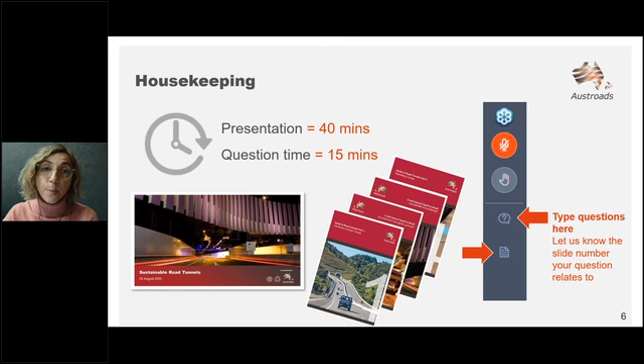So our presenters today: Georgia O'Connor, a senior professional leader in the environmental management portfolio of ARRB's Sustainability and Material Performance team. Tony Peglas, a technical director at Aurecon with experience in the planning, design, contract documentation and construction supervision of tunnels, civil structures and major infrastructure transport projects. And Les Lewis, an independent consultant with over 50 years experience in road engineering and management.

We will first hear from Georgia, who will introduce the team and provide an overview of the project. Then Tony and Les will talk about sustainability in road tunnels, covering some specific areas of sustainability practice. Georgia will conclude the presentation with the summary of key points, and then we will move to your questions.

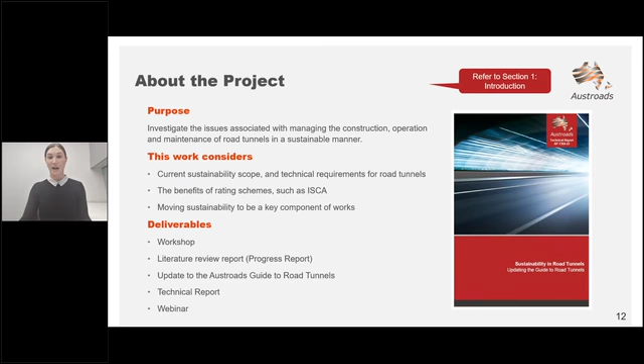So the 5 key deliverables of this project were a stakeholder workshop, a literature review report, a technical report summarising the research, updates to all 4 parts of the Guide to Road Tunnels, and this webinar. So at this stage, the technical report has been published on the Austroads website, and the 4 updated parts of the guide will be posted shortly.

So the Austroads Guide to Road Tunnels provides guidance on the planning, design, operation and maintenance of road tunnels in Australia and New Zealand. The guide is designed to be used by engineers, tunnel operators and technical specialists in tunnel technology, proponents of road tunnel solutions, senior decision makers and regulators in the various jurisdictions associated with the construction of road tunnels.

There are 4 parts to the guide. These are Part 1, Introduction to Road Tunnels, Part 2, Planning, Design and Commissioning, Part 3, Operations and Maintenance, and Part 4, Retrofitting Tunnels.

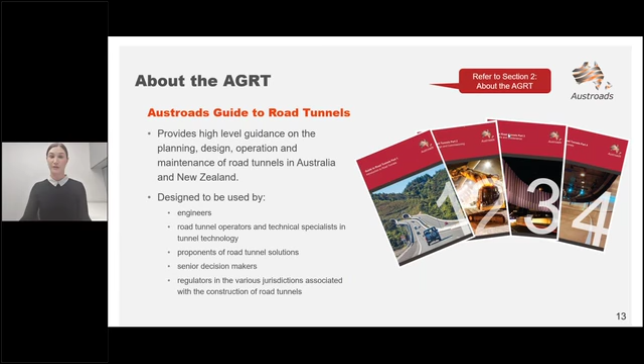So as described, this project aimed to investigate the issues associated with managing the planning, design, construction, operations and maintenance of road tunnels in a sustainable manner. And it aimed to provide guidance on how to consider and address sustainability during the life cycle of road tunnels.

So in order to provide this guidance, extensive updates have been made throughout all 4 parts of the Guide to Road Tunnels based on the research which will be presented in today's session. So prior to this update, sustainability was only briefly mentioned in the guide. Today, we're going to be focusing on some of the key areas of research.

Specific and extensive additional information is provided in the technical report, and the covers of the Guide to Road Tunnels are included down the side of each slide, which you will see there on the right-hand side, and will be shown in colour where the relevant sustainability information being presented is included in that part of the guide. So for example, part 2 of the guide will be highlighted when we're discussing issues of construction.

In addition, there's a speech bubble included on the top of each slide, as shown in this slide here in red. So this bubble signifies the section of the technical report, which the content can be found in more detail.

So as I've mentioned, at the heart of this project is the concept of sustainability. It's a complex and evolving subject whose definition may vary from country to country, from industry to industry, and occasionally from time to time. So defining sustainability correctly in this project ensured that the updates we were able to provide in the guide were fit for purpose on the aspects of sustainability that truly matter for road tunnels across Australia and New Zealand. So this section of the webinar will start by providing an overview of the selected definitions for sustainability in this project.

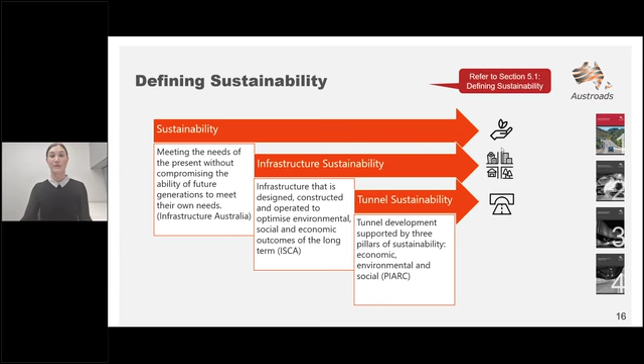So as I mentioned, PIARC identifies 3 pillars of sustainability as shown in this image, which are sustainable economy, social and environmental outcomes. However, these pillars can't be seen to be independent. All the pillars do need to be supported in order to consider a tunnel truly sustainable, but in reality, sustainability choices for a road tunnel are typically a compromise between a balance of the pillars, as is also shown in the diagram on the slide.

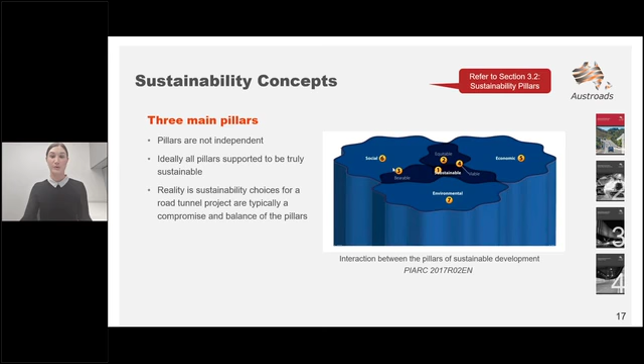So here we take a closer look at the 3 sustainability pillars recommended by PIARC for road tunnel development. So the economic pillar aims to promote the generation of wealth that leads to improved living standards. To meet this aim, considerations should be given to identifying the optimal solution and implementation option that can deliver the highest net economic benefits. The environmental pillar recognises the impact that a tunnel may have on the natural environment.

Considerations here may be to mitigate environmental impacts, including the management of pollutants, the consumption of energy, and the efficient use of resources. The social pillar speaks to the impact on people and society, including health, housing, employment, and other focus areas. Specifically, noise impact, visual amenity, and accessibility are just some of the examples of impacts that road tunnels may have on their nearby communities.

So I'm now going to pass over to Tony and Les, who will discuss how sustainability relates to a road tunnel. This will include the importance of sustainability, the effectiveness of sustainability rating systems and tools, the Sustainable Development Goals, and sustainability barriers. Over to you, Tony and Les.

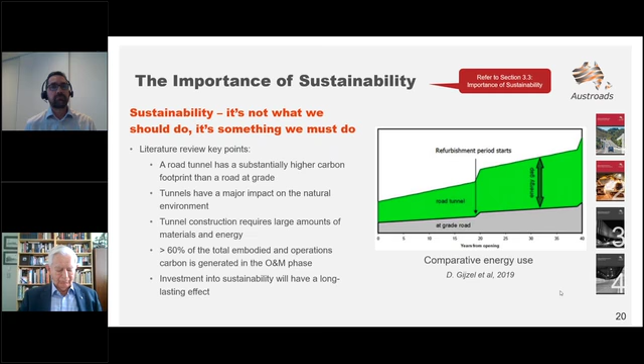Another common theme identified through the project was that the earlier a sustainability initiative is considered, such as in the design phase, the better chance it has to be fully coordinated and incorporated into the lifetime of the project. And it'll also be less costly to implement. So this isn't really a surprise and aligns with the systems engineering approach in the most recent guide update where focus is made on defining requirements early in the life cycle where costs and impacts are most efficiently managed.

So during the planning and design phase, you have the most potential to impact on sustainability. And during construction, the focus typically shifts to minimizing energy consumption and waste and limiting impacts on the environment and community. And then once operating, it's mainly about optimizing and improving on what has been inherited from the design, since tunnels are energy intensive infrastructure using energy 24 hours a day, and they require continual maintenance and refurbishment and upgrades.

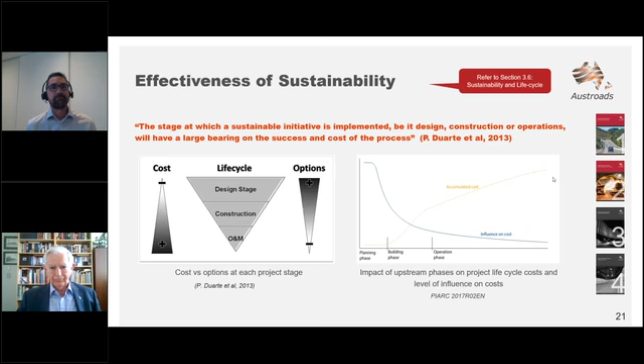I'll now hand over to Les. Thanks, Les. Thanks, Tony.

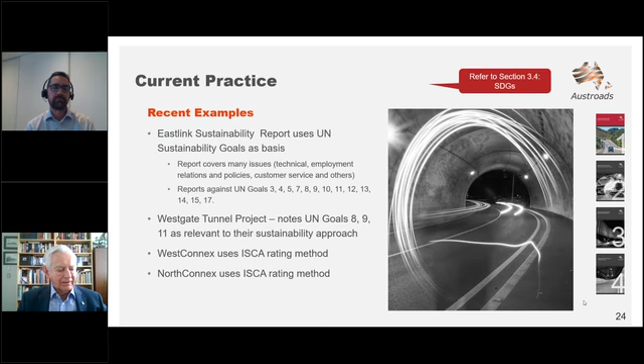Over to you, Tony. Thanks, Les.

So the project identified potential barriers to achieving good sustainability outcomes on tunnel projects. Now I'll give here a few examples. So the first is contractual requirements. Sustainability is often expressed in contract documents as one of many requirements to meet, but typically it's not given a significant priority. So when a potentially improved sustainability outcome conflicts with time or cost or risk, there's no incentive for sustainability to win.

An example of this was the Cross River Rail project in Brisbane, where the use of geopolymer concrete was considered. However, the additional cost meant that there was no incentive for the contractor to push for its use. So raising the priority of sustainability requires commitment and communication at the client level as part of procurement, and this message has been reinforced in the guide update.

Rating systems can be taken advantage of by adopting unrealistic business as usual standards, and a mitigation for this is to specify the business as usual standards before the tender process, and some jurisdictions have already started to implement this.

Approval of new materials. To achieve sustainability in practice, new materials must be permitted, and if this isn't contemplated or allowed under current client materials specifications or Australian standards, then a contractor who would seek to use these would likely face a long and risky approval process, and at the end of the day, this may not be worth pursuing by the contractor, particularly in a competitive bid environment or a time-constrained delivery program.

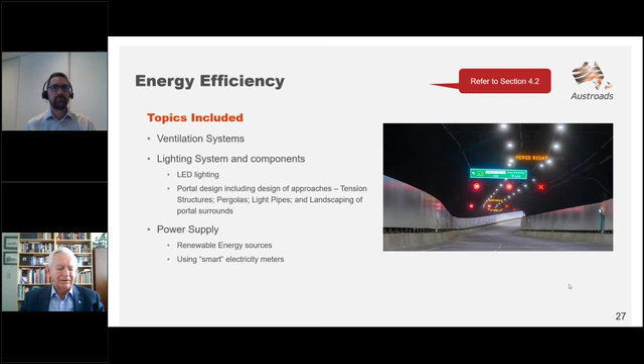Material selection in the design phase affects all subsequent phases of the pavement life, and therefore has a major effect on the sustainability of the pavement. And this requires consideration of the energy used in the production of the materials, the effect on energy use by the vehicles travelling on the pavement, that is the rolling resistance of the finished product, a reduction in lighting required by the use of light-coloured pavements, potential deleterious effects on the environment related to the production of alternative materials, for example, additives used, rehabilitation options at the end of the life of the pavement, and deleterious effects of disposal of the materials at the end of life.

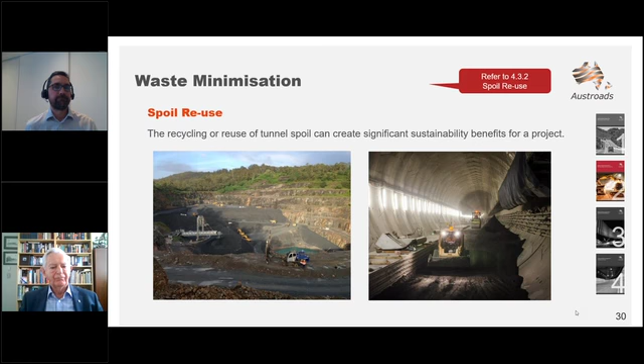During construction, transport is a major player in carbon emissions. Construction sites could be suitable for the use of non-fossil fuel powered vehicles. As an example, hydrogen fuel cells have been trialled in the mining industry as part of pilot programs. And since transport is located within a confined area on site, refueling can be undertaken with a dedicated refueling station. Electric machinery is yet to be adopted at scale in construction, but it's starting to be deployed with increasing numbers.

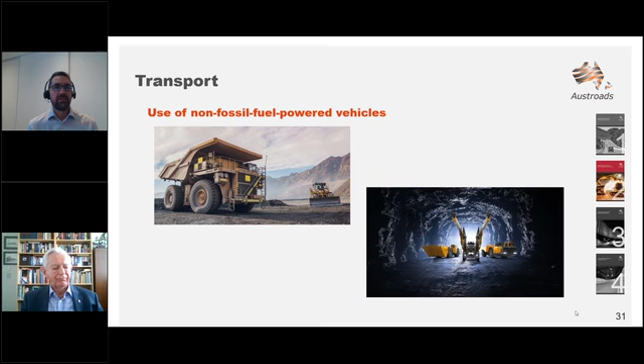And just worth noting that the last few examples that I've mentioned are implemented in the construction phase, but they still need to be identified early in the planning and design phase in order to be successful. And they also require the client to structure the procurement of the project in such a way that sustainability is prioritised.

Many road tunnels in Australia don't allow portal emissions, and typically this is set through the environmental consent conditions as part of the procurement of the project. And this is a significant constraint on the design of the tunnel ventilation system. So the ventilation system is required to extract the air in the tunnel by pulling it against the natural direction of traffic flow at the portals and then forcing it out of a ventilation outlet. And this requires operation of the system 24 hours a day with significant costs in terms of energy consumption. So this isn't a flexible solution and doesn't take into account the likely reduction in emissions from vehicles built in the future, such as electric vehicles.

And also doesn't take into account the varying use of the tunnel through a given day or week. So for example, in the middle of the night, there probably are very limited vehicles using the tunnel. So a more energy efficient ventilation system is to implement a managed approach, which allows portal emissions at certain times, so long as air quality standards are met. And this is discussed further in the guide. And this approach was implemented successfully on the Waterview Tunnel in New Zealand and recently for some existing Australian road tunnels.

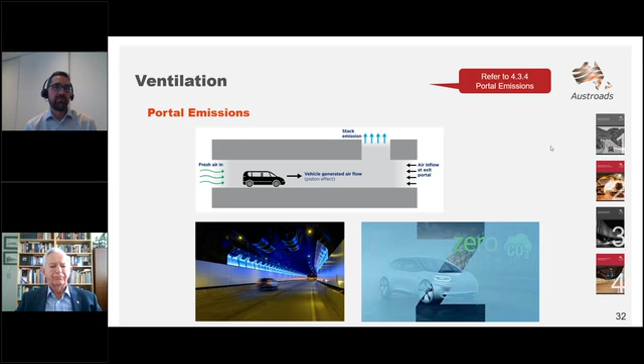In this context, preserving the ecology of an area is an important part of providing a sustainable solution for an infrastructure project. The construction and operation of a tunnel may alter the availability and quality of the surrounding natural environment as habitats for flora and fauna. Appropriate measures must be taken to minimise any environmental or ecological damage. Degradation of habitat can be measured by the size of the area affected, the time span of degradation, that is irreversible or reversible, and the size of the fauna population that is removed due to the project.

Population and number of flora and fauna species that are divided by the alignment of the tunnel provides a measure of the fragmentation of habitat. The number of species of animals whose living condition is affected by the environmental emissions, that's fumes, noise and water discharge, from the construction and operation of the tunnel provide a measure of the disturbance to fauna. These matters must be addressed in the planning, design, construction and operation of the tunnel.

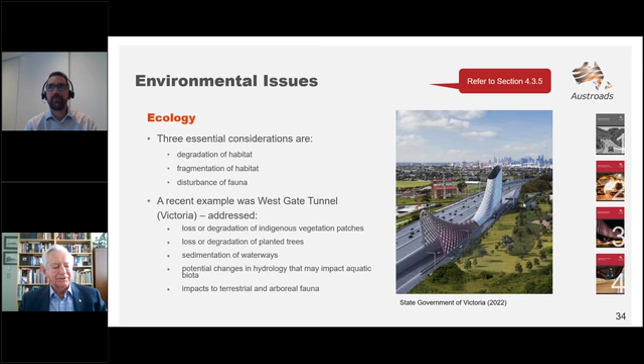Consideration of heritage values is an essential component of providing an overall sustainable tunnel project. This has not been addressed in previous editions of the AGRT. Guidance on Indigenous heritage is provided by references listed in the update. In addition, all states and territories have legislation requiring consideration of European heritage values, and tunnel projects must adhere to this legislation. And that's the extent of the comments we make in the AGRT.

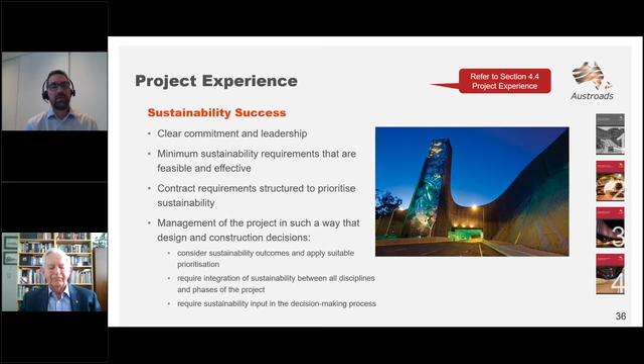These include clear commitment and leadership to deliver sustainability outcomes, identifying minimum sustainability requirements that are feasible and effective, and this requires consideration of the scale of the project as well as the project scope and design. Structuring contract requirements in such a way that the project team and client prioritise sustainability, and management of the project so that design and construction decisions consider sustainability outcomes. They apply suitable prioritisation and then integrate sustainability across all disciplines and phases of the project.

Thanks for that overview, Tony and Les. So, as we mentioned at the beginning of the webinar, the objective of this project was to embed the consideration of sustainability into all parts of the Guide to Road Tunnels. As you will have seen throughout today's session, we've undertaken extensive research into road tunnel sustainability, which is provided in the Sustainable Road Tunnels Technical Report and as part of updates to the Guide to Road Tunnels. The technical report has been published on the Austroads website and the updates will be coming shortly.

So the key focus of the research has been that sustainability can only be achieved through a balance of the 3 pillars of sustainability as defined by PIARC and through specific actions through a range of individual elements of a road tunnel as presented in that specific content by Tony and Les. So the overall sustainability picture is presented up front in part 1 of the guide with a new section titled Sustainability. And this section is referred to throughout all other parts of the Guide to Road Tunnels.

The individual elements and specific actions which have been detailed today and which are extensively provided in the technical report are dealt with where relevant throughout the guide parts. For example, lighting and ventilation is in part 2. As I mentioned, that was shown down the side of the slide on all of the sustainability content presented today.

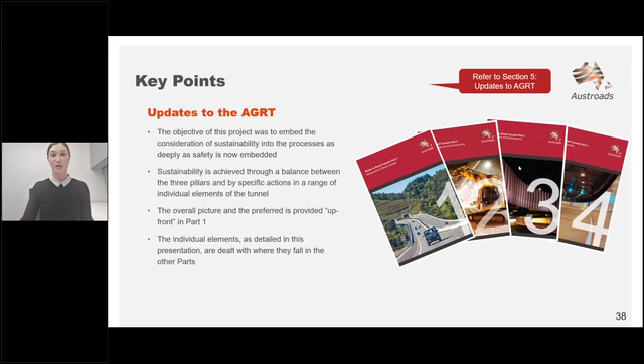So we're now going to move into discussing some of your questions that we've received today. I can see on my screen here that we have a few questions that have come through. So the first question we have here today is, what is Austroads' position on portal emissions and portal capture? EPAs enforce portal emissions capture, but this can come at a massive cost. I believe this question did come through before our slide on portal emissions, but Tony, was there anything else that you wanted to add here?

I guess the position is now that the guide has been updated to recommend, where it's appropriate, that a managed portal emissions approach is a more sustainable outcome, as long as air quality and environmental criteria are still met. And as I was saying, Waterview Tunnel has implemented this quite successfully, and I understand there are existing Australian road tunnels applying to change their requirements to fit that approach where appropriate. Great, thanks for that, Tony.

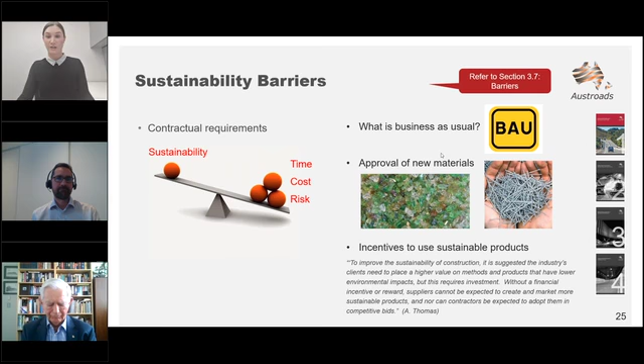So our next questions are both in regards to slides 28 and 29, which are around sustainable materials. So the first one is, is crumb rubber asphalt permitted in road tunnels? Sorry, what was that? Crumb rubber asphalt. I didn't quite catch what that was. So the question was, is crumb rubber asphalt permitted in road tunnels?

Oh, crumb rubber. I can partly answer that. Generally, pavements in road tunnels are CRCP, so continuously reinforced concrete pavements. It's usually up to the jurisdiction in terms of allowing what type of pavement is in a road tunnel, but generally because they want to limit the amount of closures and they want a long design life, a concrete pavement is specified. That has significant benefits also in terms of the wearability of the pavement and any creation of particulate matter that might get into the atmosphere in the tunnel. Much better to have the concrete.

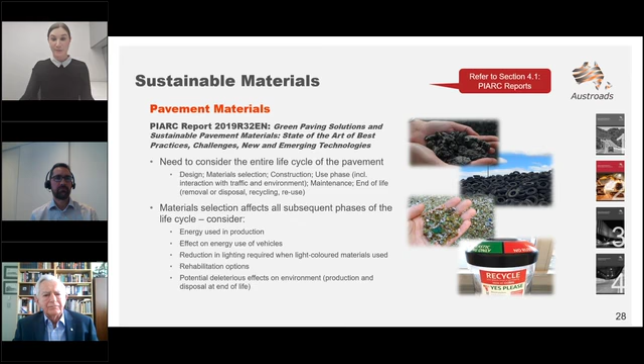Okay, great. So our next question is, fly ash as a replacement for GP cement is business as usual in New South Wales. Why is this geopolymer cement better than fly ash replacement?

I don't know the answer to that.

So geopolymer concrete, my understanding is, is made with a geopolymer binder instead of conventional Portland cement, and that's where the real benefit is. The binder is a reaction of aluminate and silicate materials with an activator. So waste products like fly ash and blast furnace slag can be used with that activator. So this is really good from a sustainability point of view.

Basically, the production of cement creates huge amounts of carbon emissions, and this is due to two main things. There's a chemical reaction when you heat limestone, which is a key material for the cement, which releases carbon dioxide, and also the energy required for the heating itself. So technically, I understand geopolymer concrete is just as good as concrete and has other advantages as well, in terms of high compressive strength, low creep and shrinkage, etc.